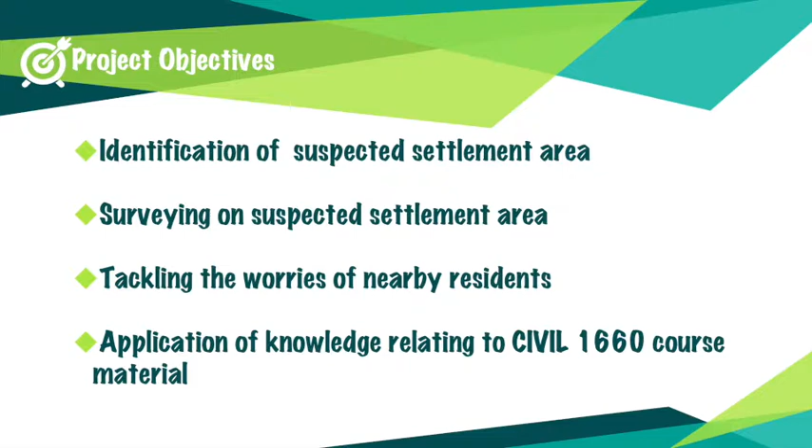By reading the Legislative Council document, the government expected 300 mm settlement after 1 year of reclamation. In October 1999, the government recorded 340 mm settlement.

Although the settlement was slowed down after August 1999, it affected factory operations seriously, such as machines could not enter the factories due to a huge gap at the front door. From the pictures, we can see that remedy was made by filling up the gap with concrete. The furious settlement made many residents who live nearby worried their property would be damaged.

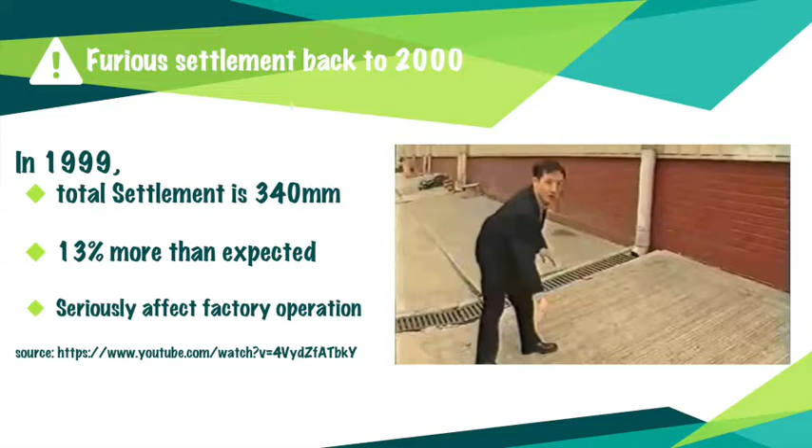After nearly 2 decades, settlement problems are still troubling Tseung Kwan O residents. News reporters found that a newly constructed bridge in Tseung Kwan O has multiple signs of differential settlement. Pedestrians can see cracks on the road surface and serious dislocated connections. This caused a public outcry for further investigations.

This news leads us to our question: Is the reclaimed land still sinking in 2017?

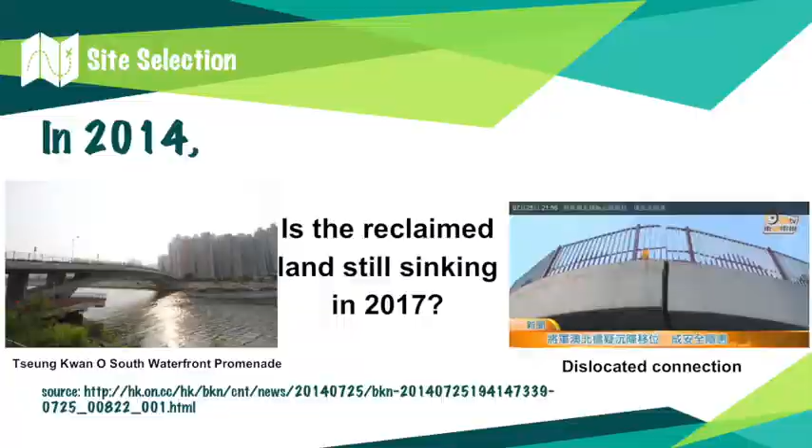After knowing the project focuses on the problem of settlement, what is settlement actually? Settlement refers to the distortion and disruption of parts of buildings. The well-known Leaning Tower of Pisa is one of the cases showing settlement. It usually happens due to foundation sinking and soil movement.

There are three kinds of settlement: uniform settlement, tipping settlement, and differential settlement, all caused by different reasons and giving different consequences.

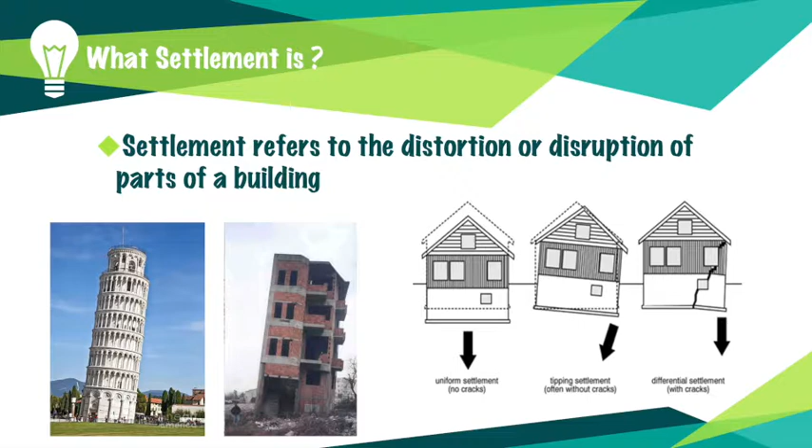There are two main reasons for the occurrence of settlement. First, if the weight of the buildings or structures exceeds the capacity of the soil, the compressional force will be too big for the soil to hold, causing the sinkage of the building. This problem is mainly due to dead and live loads.

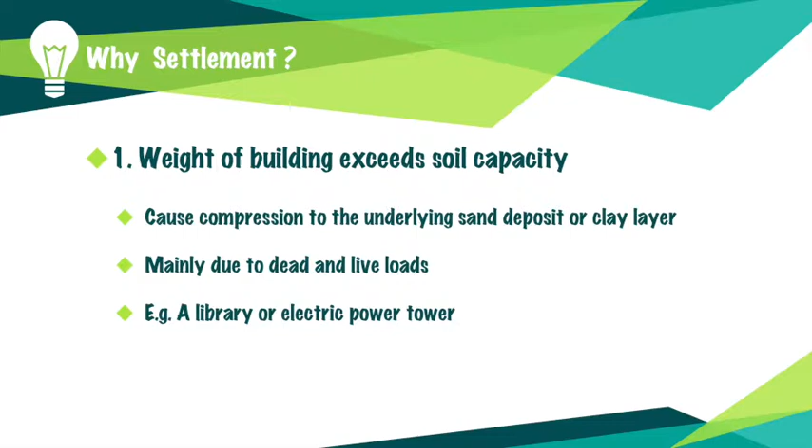Take libraries as an example: the unexpected huge amount of additional books will bring huge pressure on the soil and lead to settlement. The second reason is soil movement.

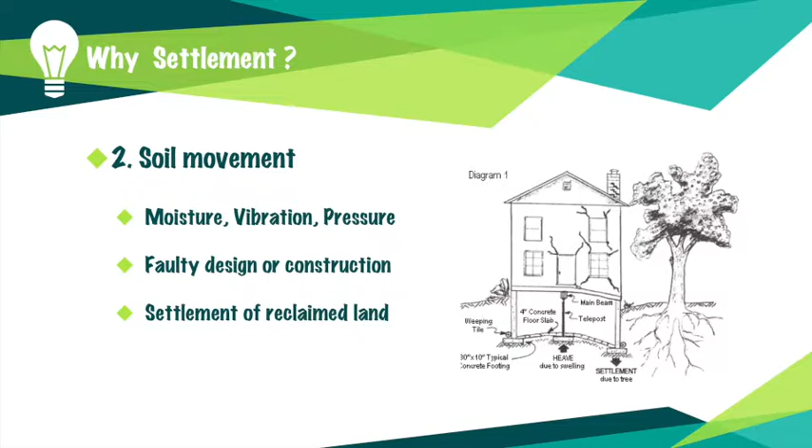There are many reasons behind soil movement, like moisture, vibrations, and pressures, which all affect the soil. Other than these natural factors, faulty design or construction made by mankind may also lead to soil sinkage. Besides, reclaimed land is also vulnerable to settlement.

As for the consequences, if the case is not serious, meaning the extent of settlement is below the permissible limit, the building itself above ground, known as the superstructure, will not be affected too much. The damage mainly goes to the service lines.

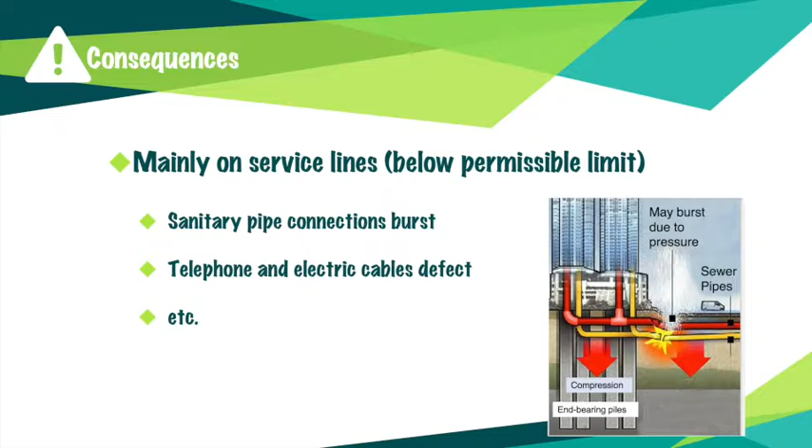For example, bursting of sanitary pipes, defection of telephone and electric cables. But if it goes beyond the limit, there may be damage to the superstructure, such as cracks on the walls and roads, or it may even lead to structural failure and collapse.

After knowing what settlement really is, you may think that the problem is far away from your daily life.

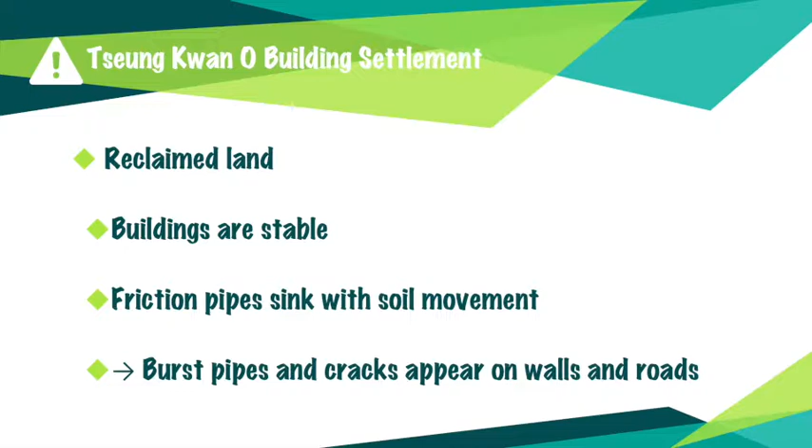But to be honest, it's not. The topic we chose is already an example of it. Parts of Tseung Kwan O are actually reclaimed, that's why it's vulnerable to settlement, and that's also the reason why we chose settlement as the topic. The buildings on top are actually stable and safe, but the friction pipe sinks below the soil due to soil movement, leading to burst pipes and cracks on walls and roads.

And now I will pass my time to Sing to talk about the research we have done.

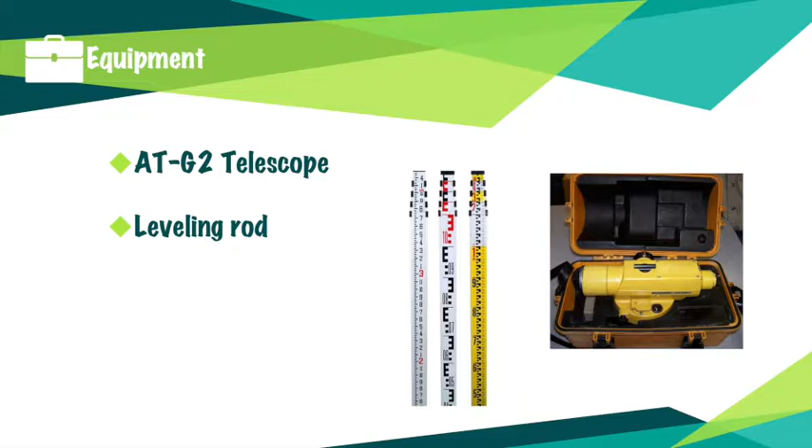As to the methodology of our research on the Tseung Kwan O settlement case, we have used several pieces of equipment, including the rotatable telescope model AT-G2 with a tripod. Also, we have used two leveling staffs to measure the heights of different spots in Tseung Kwan O. How do we determine whether the site is having a settlement or not? It's very simple. We pick several stations in the site and measure the differences between the heights of the backsights and the foresights. And we read the heights of the leveling staffs from the lens of the telescope.

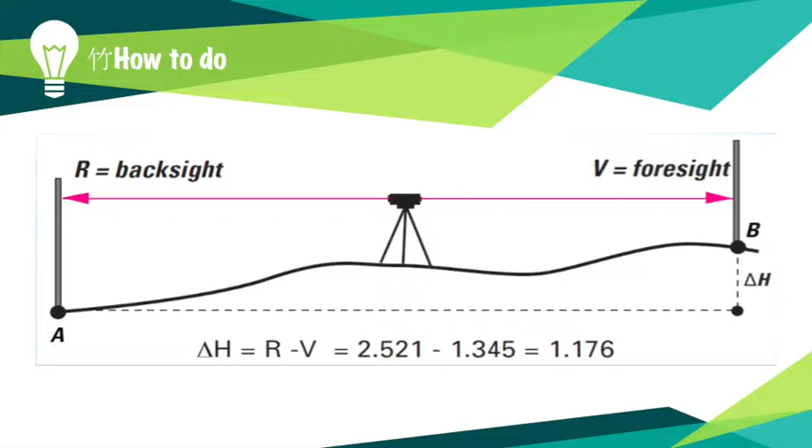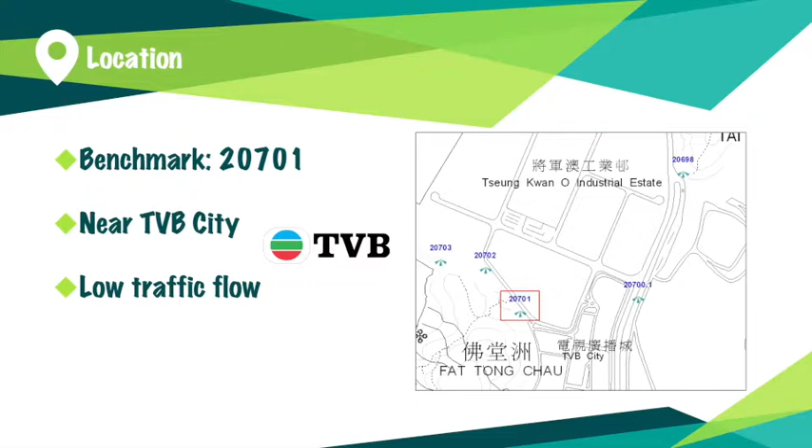In this project, we chose the location to be the benchmark 20701 near TVB City because of the low traffic flow around the site. After all the preparation, we visited the site on the 30th of March at 6 a.m. with all the equipment, and we set 7 stations from station A to station G around the benchmark 20701.

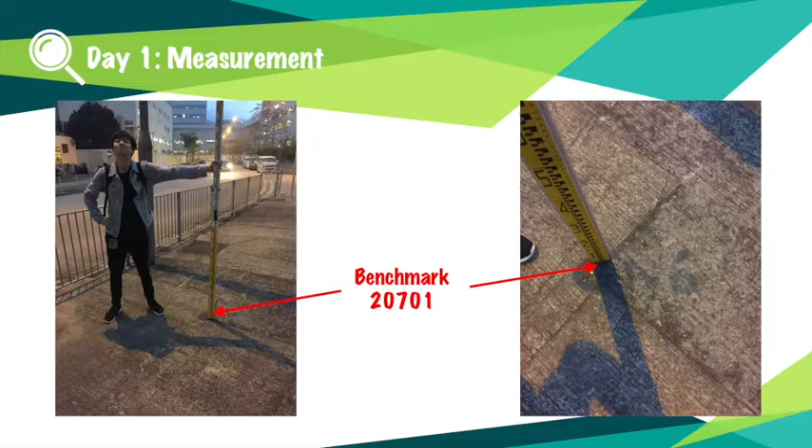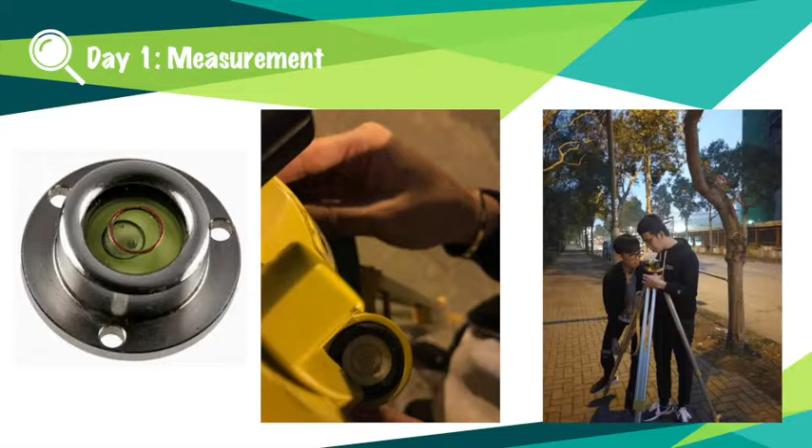First of all, we start with the benchmark as the first backsight and set up the tripod with the telescope AT-G2, using the spirit level and making sure the bubble is in the center, meaning we are using the telescope as the balance level. Then we look through the lens of the telescope and get the reading from the leveling staffs and mark it on the sheet.

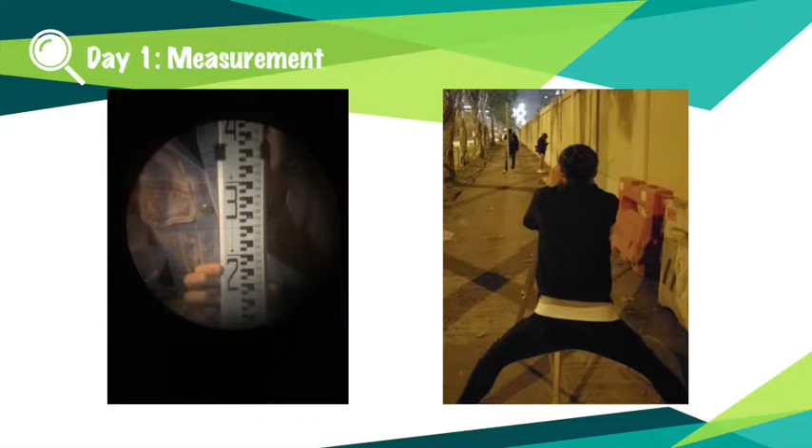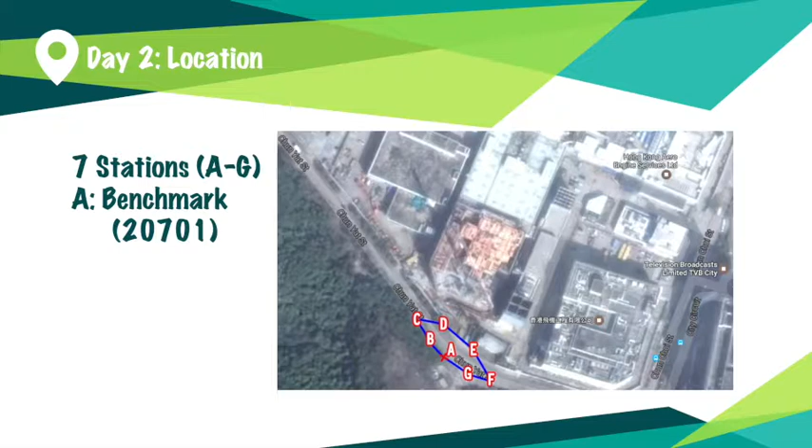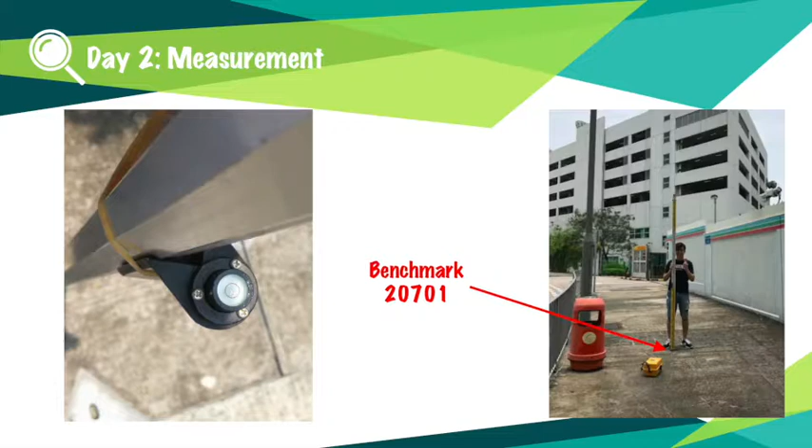We decided to revisit the site around a month afterwards, on the 9th of May at 2 p.m. Since we had marked stations A to G with a marker during our first measurement, luckily one month later only a few marks had faded, and we were able to figure out the location of the stations with the photos we had taken. We repeated the measurement procedure once more, looking through the lens of the telescope and reading the heights of the leveling staffs, and marked it on the sheet again, then compared the two sheets together.

After undergoing 2 differential measurements in Tseung Kwan O industrial area, the result is quite promising. We found that there is no settlement. We set 7 stations from A to G as mentioned, and observed the backsight and foresight between different stations. Then we calculate the difference between 2 stations and record whether it's a rise or fall. Finally, we combine all the rises and falls to obtain our value, which is to ensure the quality of our measurement and check if there is any significant human error.

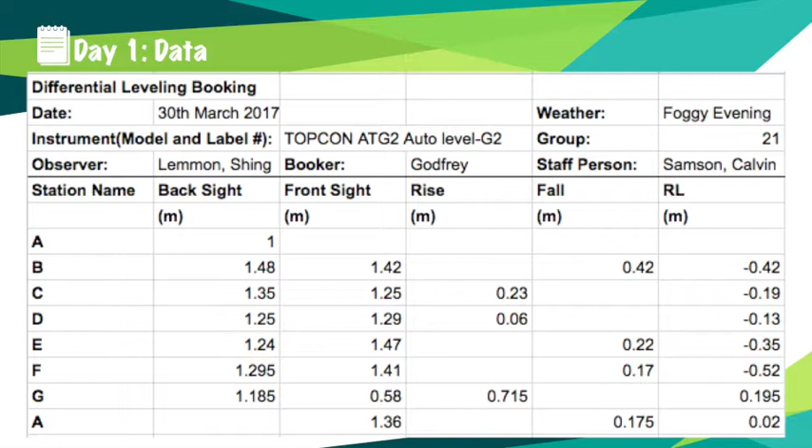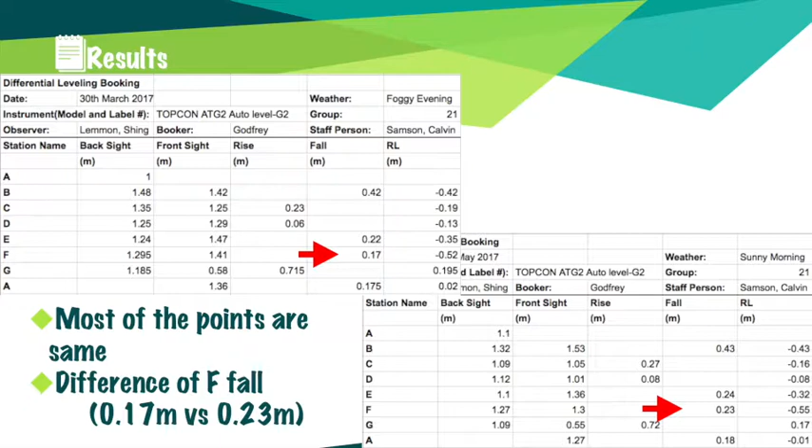These are the day 1 and day 2 data sheets that we recorded. After comparing data from the 2 days, the rises and falls are nearly the same, except the fall value at station F, which was measured as 0.17 fall on day 1 and 0.23 meter on day 2. The biggest reason is unsophisticated measuring technique, as it is hard to balance the staff on uneven ground. Also, since we carried out the day 1 observation in the evening, the insufficient light source may have led to unclear observation.

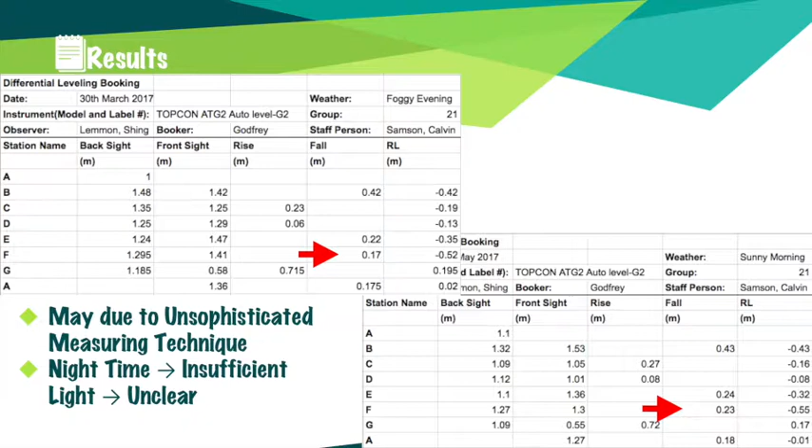Concerning the RL value as mentioned, the maximum error will be 8 times the square root of the number of stations, in millimeters. In our case, the maximum error will be 8 times square root of 7, which is about 21 millimeters. All of our measurements fall within it.

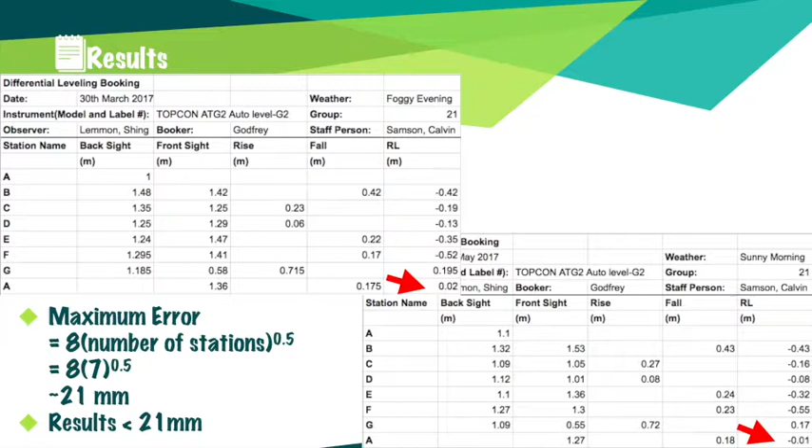Although Tseung Kwan O comes from reclamation, and reclamation always comes with settlement, there is no evidence suggesting settlement in the measuring area. As the reclamation of Tseung Kwan O finished in 1995, many years have passed allowing for settlement. Though there were a lot of news reports stating settlement in Tseung Kwan O areas, it was a long time ago. Therefore, we cannot observe settlement in 2017.

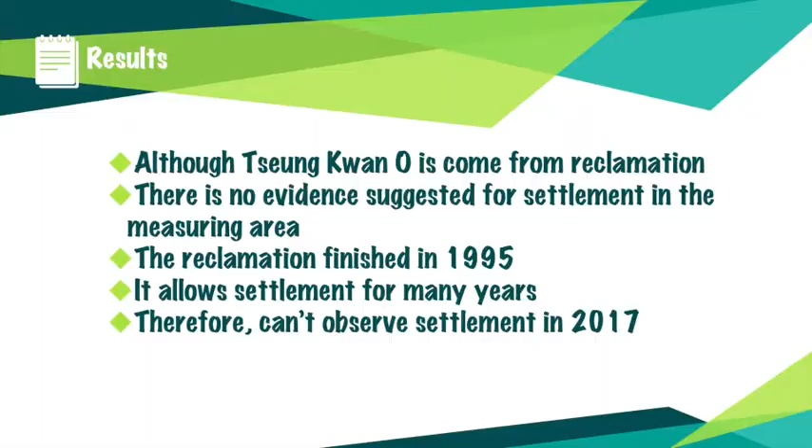I'm going to talk about the limitations and difficulties our group faced during the whole project. Our limitations and difficulties mainly consist of two issues: pedestrians and weather. I will talk about them one by one in detail now.

As mentioned before, one of our visits is in the afternoon, which leads to our first difficulty, the issue regarding pedestrians. Although the location of our measurement is right near a construction site and TVB city, there are still some pedestrians who pass through and walk by during our measuring process. Some of them even carry a trolley when they walk across, and we have no choice but to make way for these pedestrians, as the road is for public use and we cannot occupy it.

Apart from that, our measuring points are distributed along two pavements separated by a road, which means we have to put the telescope on the road to take the center point between the two points from the two pavements. When cars travel along the road, we have to avoid the car first before we can continue our measurement. We did mark the spot for our leveling rod and the telescope, and we did put it back on the spot after making way for pedestrians and cars. But still, a little bit of error may occur.

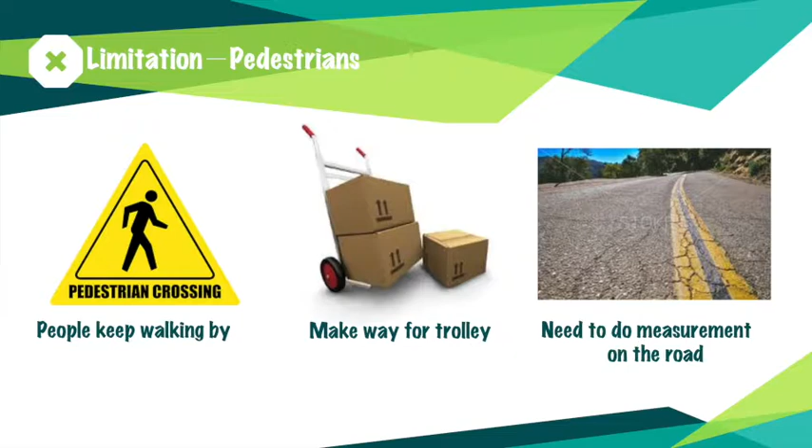Weather is also a big problem for our project. Since the location is outdoors, we cannot do measurements when the weather is rainy, in order to protect the equipment and also for safety concerns. During our first site visit, we originally planned to start at 2 p.m., same as the second site visit. Unfortunately, it was a rainy day, and we had to wait until 6 p.m. for the rain to stop before we could continue our project.

We also postponed our second site visit due to heavy rain, and problems came along with it. The rain washed away some of our markings left from the previous site visit for the location of the leveling rod. Most of them survived the heavy rain and could still be seen by careful checking, but one of the marks was totally washed away. In the end, we used the photo we took on the first visit to help us estimate the location of the leveling rod.

Despite these two difficulties we encountered, we tried our best to find ways to compensate and reduce the error of our measurement. Turns out that the result is acceptable and within the range of the error rate.

To conclude, there was no settlement found after our investigations. According to the Legislative Council document, the abnormal ground settlement was due to unexpected groundwater-related subsidence. This caused the soil to loosen its bearing capacity, and Tseung Kwan O ended up with serious ground settlement. This problem was fixed by blocking underground water from entering the sewage system in 1999, and the government has ensured no more ground settlement in Tseung Kwan O since then.